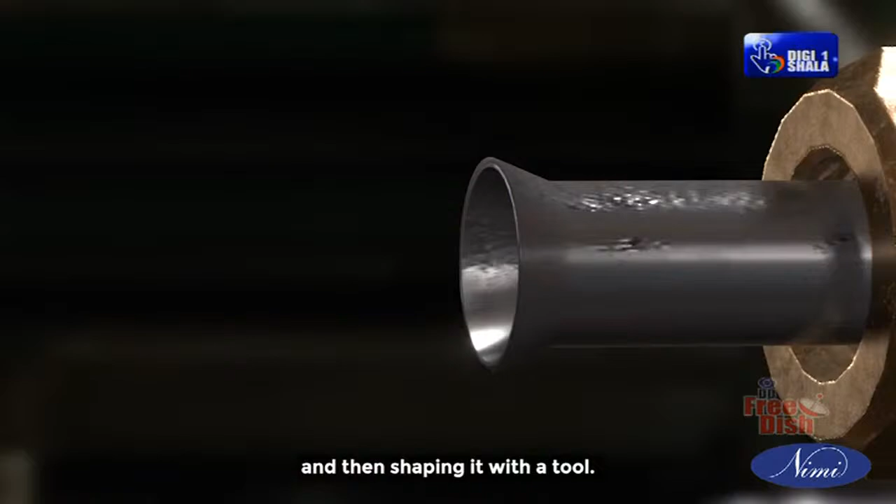The flared end helps to create a seal when the pipe is connected to another pipe or fitting. Flaring is used in a variety of industries including plumbing, oil and gas, mining, and steam systems.

Let's go into the video. At the end of this demonstration, you will be able to cut a GI pipe using a pipe cutter, remove burrs using a pipe reamer, flare the end of the pipe, join the flare nut with a flare fitting, and test it.

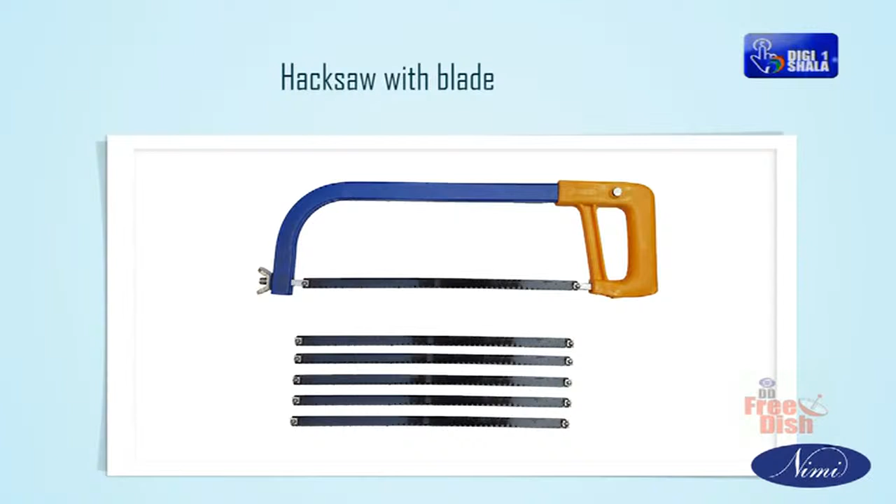Tools required: adjustable wrench 200 mm, valve key 6 mm, cylinder valve opener, pressure gauge with adapter, cylinder with pressure, water pump pliers, pipe cutter, hacksaw with blade, tri-square, punch tool.

Equipment required: flaring block with yoke, flat file smooth 200 mm, pipe vise. Materials required: GI pipe, flare nut to suit the pipe, thread seal tape, soap solution with stirrer, and a small quantity of oil.

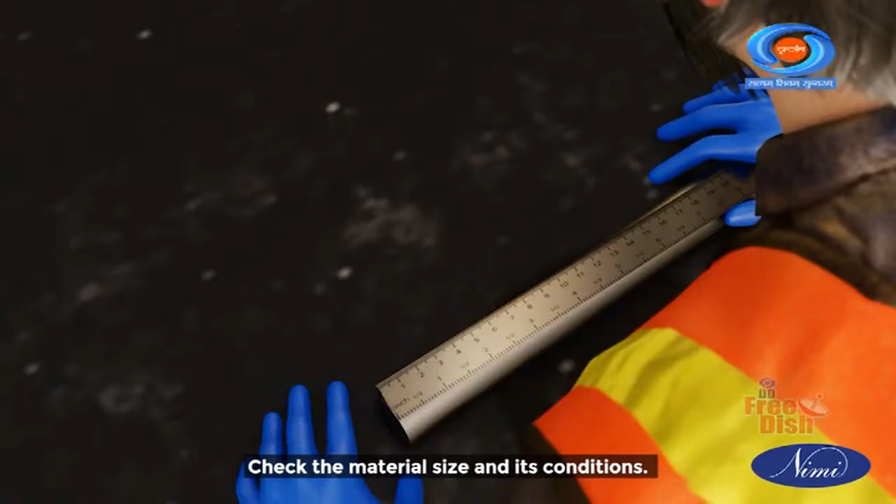Before starting the job, there are some preliminary checks to be made. Those are as follows: check the material size and its conditions.

File and check that the end of the pipe is exactly perpendicular to the pipe axis. Slightly deburr the inside and outside edge of the pipe. Clean the pipe throughout before installing into a flaring block. Insert and fix the pipe into the flaring block's selected hole.

Note: examine the pipe flaring tool before starting to flare the end of a pipe. Tighten the nuts at each end of the flaring block properly. Position the pipe end to at least 4 mm above the top of the flaring block.

Note: this distance is calculated as pipe diameter divided by 3. In this case, 12 mm divided by 3 is equal to 4.0 mm.

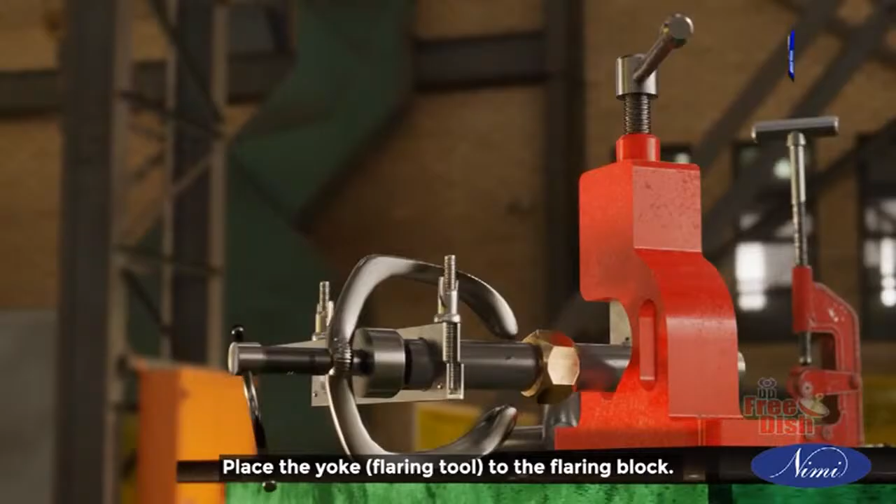Place the yoke, the flaring tool, onto the flaring block. Note: insert the flare nut before flaring. Oil the cone and slowly screw it into the end of the pipe. The end of the pipe will be formed into a flare. Note: do not over-tighten the screws.

Unscrew and remove the flared pipe from the block. Check the flare end for cracks. Note: because the cone was screwed down too quickly, the flare is cracked.

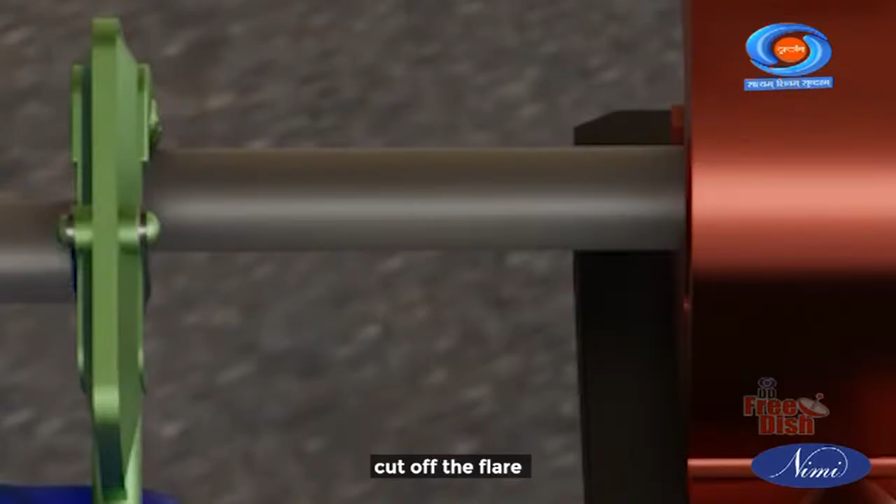Make sure that the flare is the correct size. If there is any crack or it is too loose while fitting the flare nut, cut off the flare and start again as per the above instructions until the flare is the correct size for the flare nut.

Next, we are going to make flare joints and test them with flare fittings. Flaring: brake line pipes, fuel pipelines, and air conditioner pipelines are sometimes joined to fittings by making a flared connection. The end of the pipe is opened out to form a cone.

Always place the special flare nut on the pipe first before flaring. Examine the pipe flaring tool. Make sure that you understand how it works before starting to flare the end of a pipe. Make sure that the end of the pipe is free of rough edges before flaring.

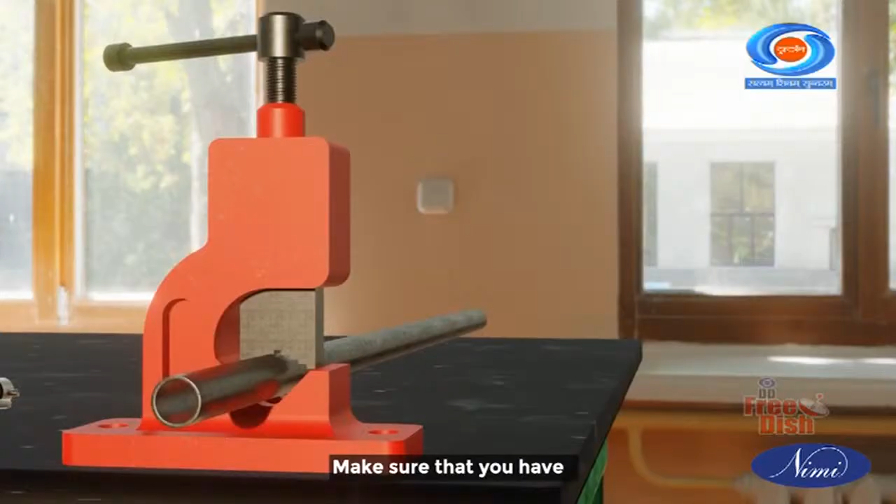Place the pipe in the tool. Make sure that you have placed the flare nut on the pipe. Choose the correct size hole in the flaring tool to fit the pipe. There are 5 holes to fit different sizes of pipe. If the pipe is 1 by 4 inch, 6 mm in diameter.

Position the pipe so that the end is at least 2 mm above the top of the flaring block. This distance is calculated as pipe diameter divided by 3. In this case, 6 mm divided by 3 is equal to 2 mm.

Tighten the nuts at each end of the flaring block. Fit the yoke to the flaring block. Note: repeat the steps for the various sizes of GI pipe.

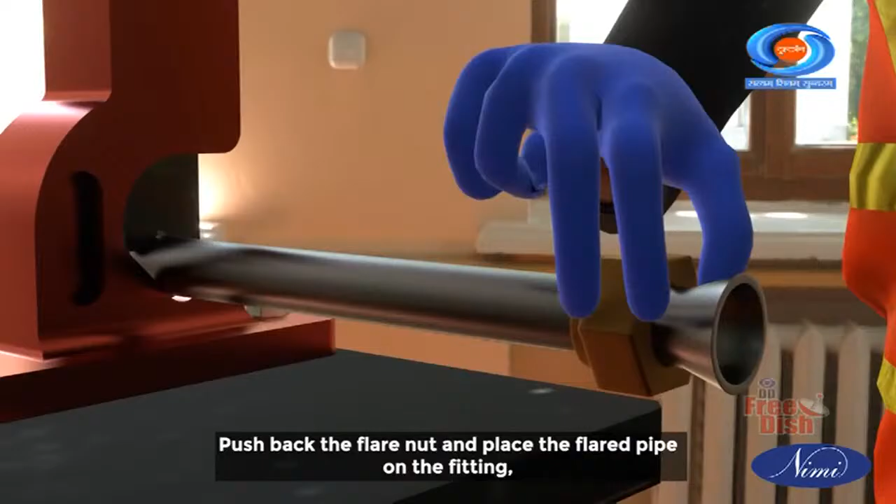Joining with flare fittings: put thread seal tape on the thread. Push back the flare nut and place the flared pipe on the fitting. Then tighten the flare nut using an adjustable wrench or suitable double-end spanner.

Tighten one end of the pipe to the cylinder with the flare nut. Connect a pressure gauge at the other end of the tube with a flare nut. Note: do not apply more pressure while tightening, since this will spoil the flare. Make sure that they are not loose in the pipe.

After joining the pipe firmly, open the cylinder valve with the help of a valve key or ratchet. Note: the pressure will be shown in the pressure gauge. Then close the cylinder valve.

Major leaks will make noise, and that needs the nut to be tightened. If there is no leak, the pressure in the pressure gauge will remain constant. If it decreases, check the joints with soap solution foam. A leak will bubble, then tighten the joints. If it stands still, then there is no leak.

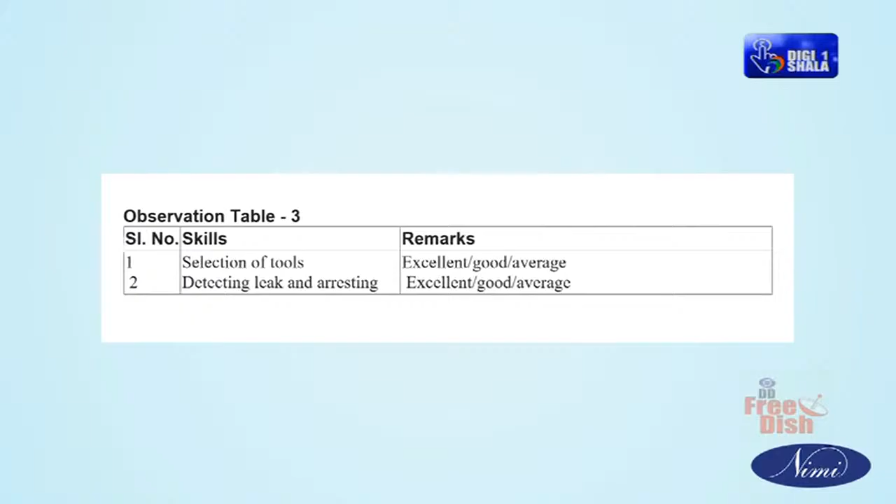Now let's have a look at handling of pipe flaring and cutting tools. Measure the required length of pipe and mark it with chalk. Keep the pipe in the pipe vise and tighten it.

Fit the pipe cutter on the GI pipe on the scribed line and tighten the jacking screw so that the cutting wheel is touching the pipe. Ensure that the pipe is kept horizontal and parallel to the serrations such that the marking is visible at the top. Rotate 1 or 2 turns to ensure that the cutting wheel is sitting exactly on the scribed line at 90 degrees to the pipe.

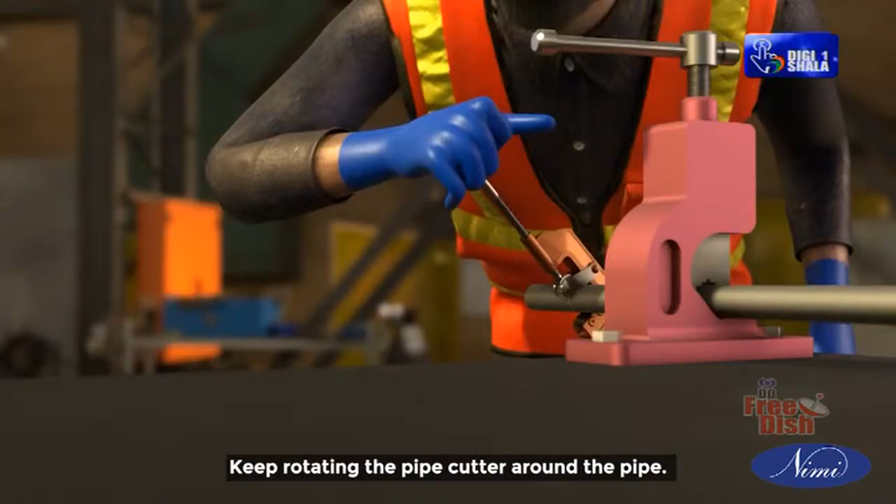Rotate the pipe cutter around the pipe. After 2 or 3 turns, use the jacking screw to apply pressure on the cutting wheel. Keep rotating the pipe cutter around the pipe, increasing the pressure by repeating the cycle until the pipe is cut through. Support the pipe with your left hand so that the free end does not fall.

Remove burrs using a pipe reamer. Check that the pipe ends are square. The inside edge of the pipe must be slightly deburred, and the outside edge of the pipe must be slightly deburred. With this edge as reference, the pipe is marked for bending.

Always use a pipe bending fixture for proper bending of the pipe. Clean the pipe thoroughly before installing it in the machine.

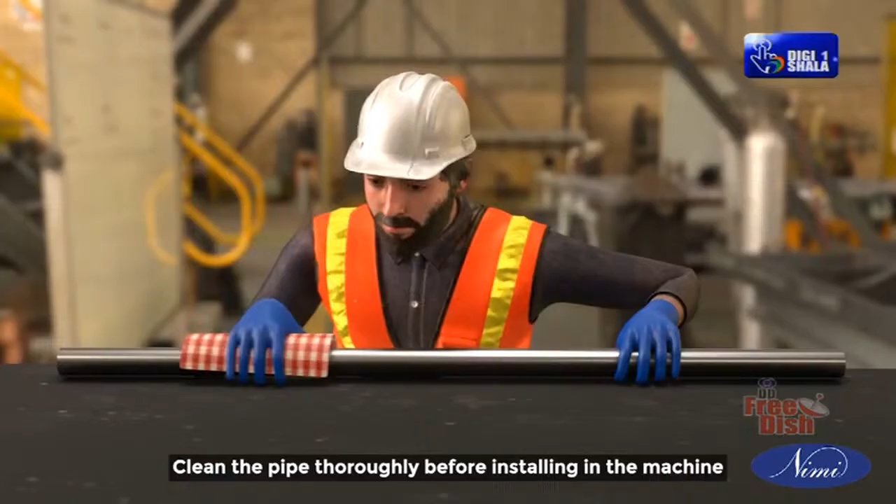Prepare the pipe end for a flare fitting. Flaring with block and punch tool: the pipe which is cleaned of burrs and bent should be selected. The pipe end is held in the flaring unit. Select the appropriate size of flaring unit to suit the pipe. The sleeve and cap nut should be assembled before flaring.

The flaring unit is held in a bench vise with the pipe. The correct length of pipe should be projecting for flaring; pipe edges should be in line with the surface. Using the flaring punch, flare the pipe end. Flaring can also be done using a compression type flaring tool.

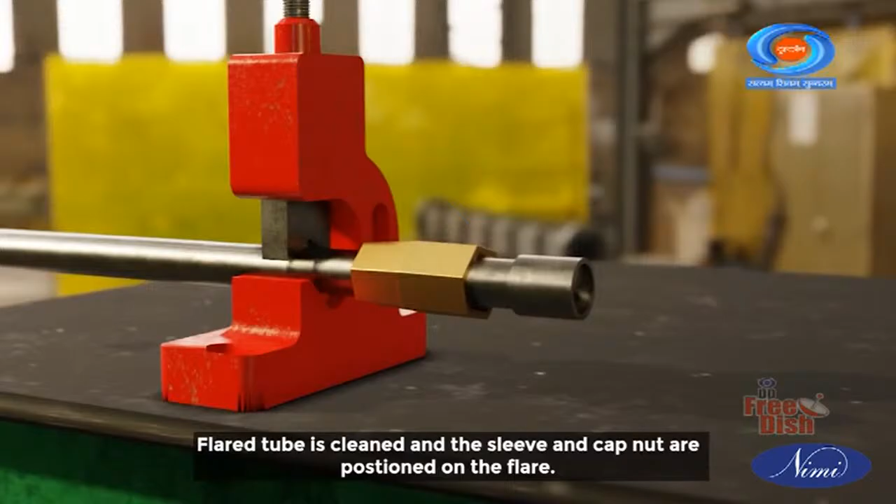Installing a flare fitting: the flared tube is cleaned and the sleeve and cap nut are positioned on the flare. Check that the flare angle is suitable to the sleeve angle. Place the flare on the connector end and confirm the angle is the same. Screw the cap nut onto the connector thread by hand, then use a suitable spanner and tighten the cap nut until the pipe does not rotate in the joint.

Let's have a recap of what we have learned today. We have learned to cut a GI pipe using a pipe cutter, remove burrs using a pipe reamer, flare the end of the pipe, joint flare nut with flare fitting and test it. Thus, we have learnt about flaring of pipes and pipe joints. Hope you have a clear understanding on this. Do this exercise with the help of your instructor.

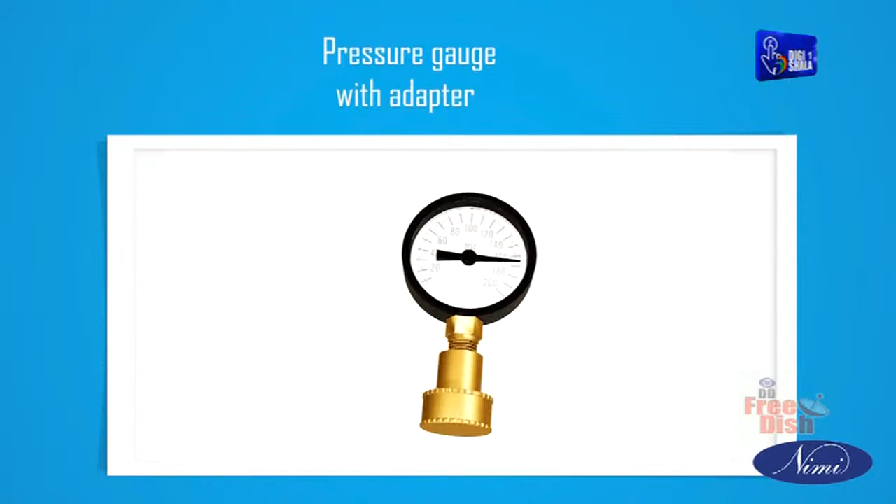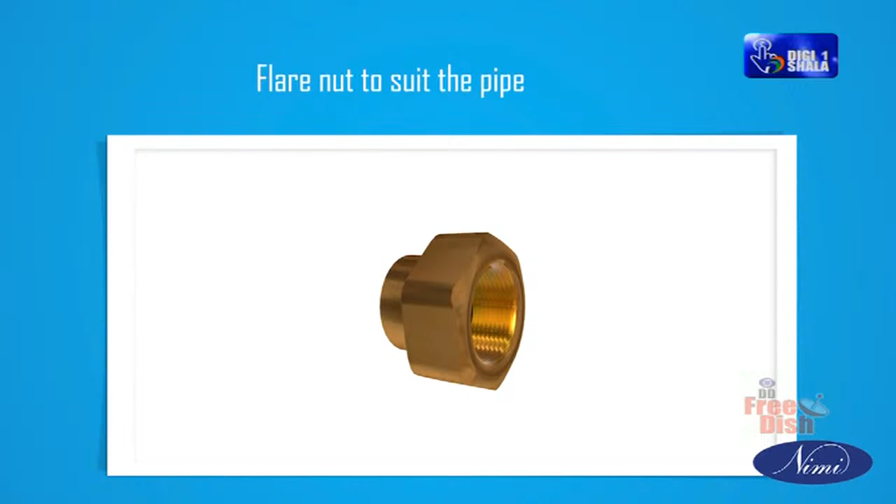Tools required: adjustable wrench 200 mm, valve key 6 mm, cylindrical valve opener, pressure gauge with adapter, cylinder with pressure, GI pipe cutter, pipe vise. Equipment required: flaring block with yoke, flat file smooth 200 mm. Materials required: GI pipe, flare nut to suit the pipe, wire brush, pipe die set with ratchet, thread cutting oil.

Before starting the job, there are some preliminary checks to be made. Hold the GI pipe in the pipe vise tightly. Mark the required length as per drawing. Fix the pipe in the pipe vise and tighten it to prevent it from rotating. Fix the pipe cutter on the GI pipe. Cut the GI pipe for the required length using the pipe cutter. Remove burrs using the pipe reamer. Check that the pipe ends are square using a tri-square.

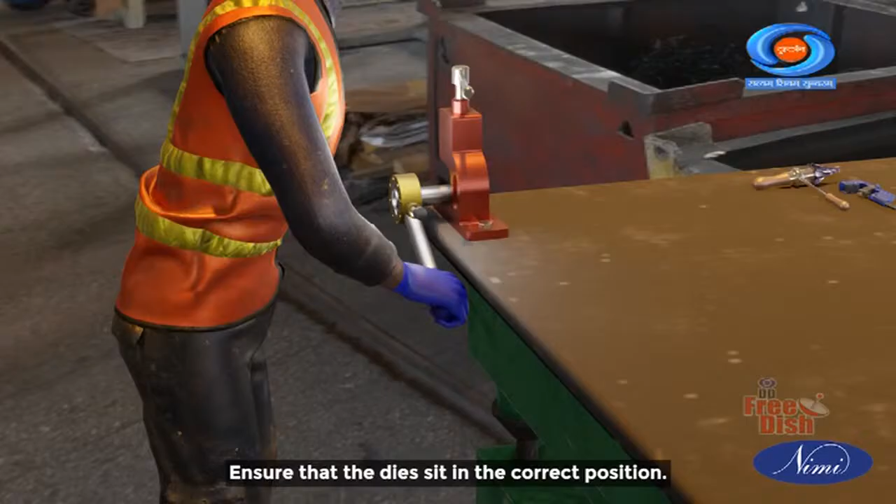Now we are going to thread GI pipes using die stocks. Select a set of dies and a ratchet type die stock. Open the adjustment lever, coincide the zero setting mark on the die stock, and insert the 4 dies according to the number on the dies and die stock respectively. Ensure that the dies sit in the correct position. Be sure that the number on the top edge of the die corresponds with the number of the slot into which it is to be placed.

Fix the pipe in a pipe vise and tighten it to prevent it from rotating, ensuring that the projection of the pipe is within 150 to 250 mm from the vise. Open the self-centering pipe guide and slide the stock over the end of the pipe. Adjust the pipe guide for correct sliding fit and lock it into position. Apply a cutting lubricant to the part which is to be threaded, using lard oil or mineral lard oil when threading GI pipes.

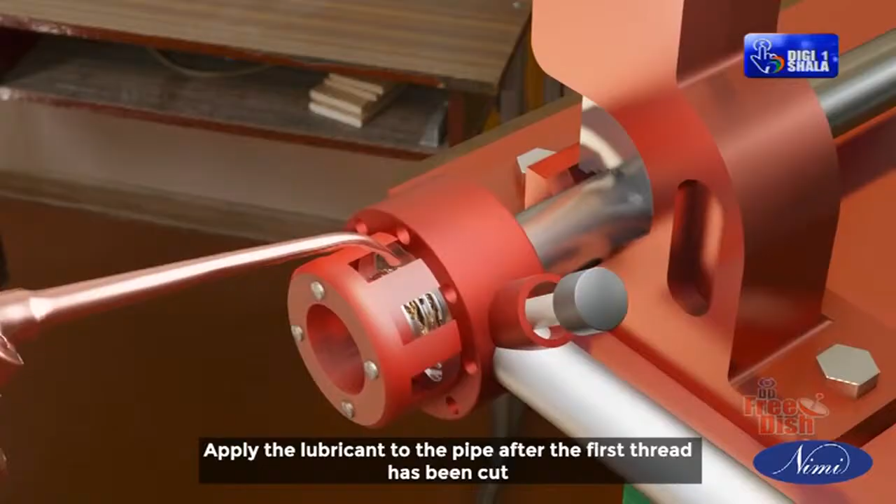Apply a little pressure to the stock and keep the handle at right angle to the pipe axis. When the dies bite into the pipe, stop pushing and continue the rotation by moving the handle up and down. Apply the lubricant to the pipe after the first thread has been cut.

Keep rotating the handles clockwise and check the length of the pipe thread. Note: ensure that the length of the thread is sufficient to fit halfway into the socket or coupling. If the die stock and the die stick, turn the stock anti-clockwise to break the chips.

Reverse the ratchet knob, ease the handle, and turn the stock anti-clockwise till the stock and dies come out of the pipe. Clean the thread with a wire brush. Form thread until the pipe extends about 1 or 2 threads beyond the end of the stock.

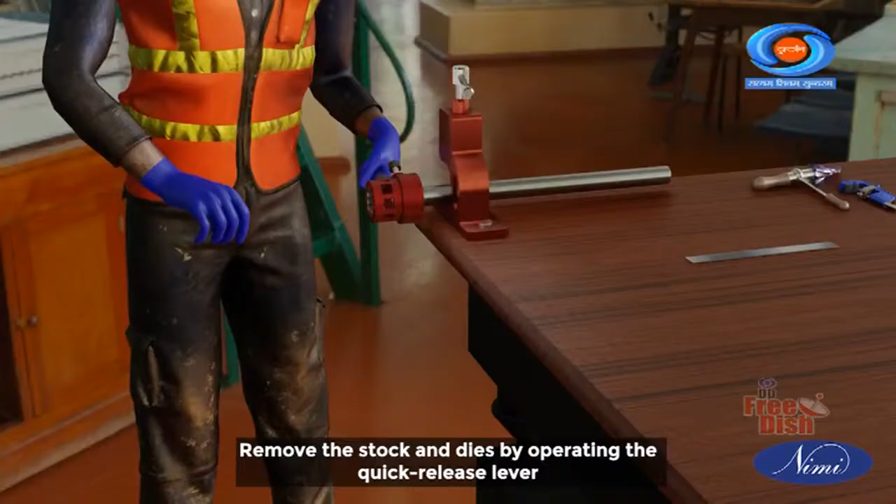Remove the stock and dies by operating the quick release lever and clean off the thread with a wire brush. Check the formation of thread with a standard fitting. Repeat the operation if the thread is too tight by adjusting the dies.

Let's have a recap of what we have learned today. We have learned to mark and cut pipe to length using pipe cutter. Thus, we have learnt about cutting and threading of pipe length. Hope you have a clear understanding on this. Do this exercise with the help of your instructor.

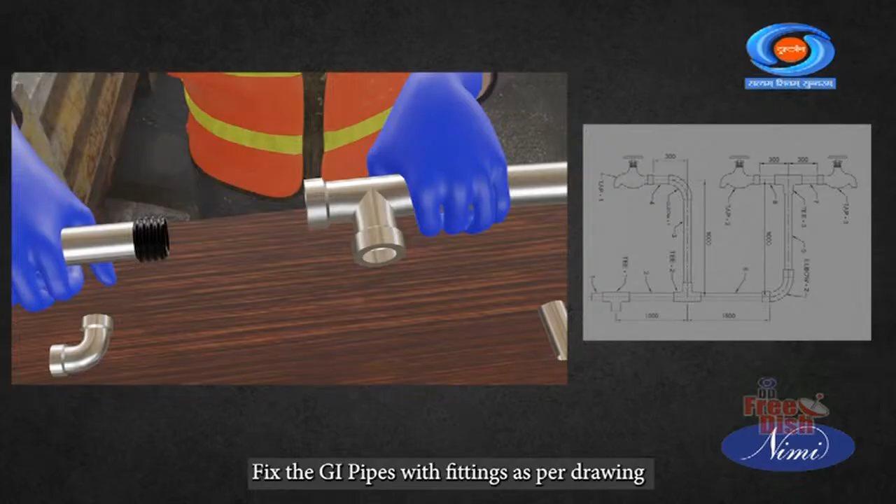that is required. Today, we are going to learn about fitting of pipes as per sketch, observing conditions used for pipe work. At the end of this demonstration, you will be able to fix the GI pipes with fittings as per drawing.

Tools required: Adjustable wrench 200 mm. Valve key 6 mm. Cylinder valve opener. Pressure gauge with adapter. Cylinder with pressure. Pipe cutter. Hacksaw frame with blade.

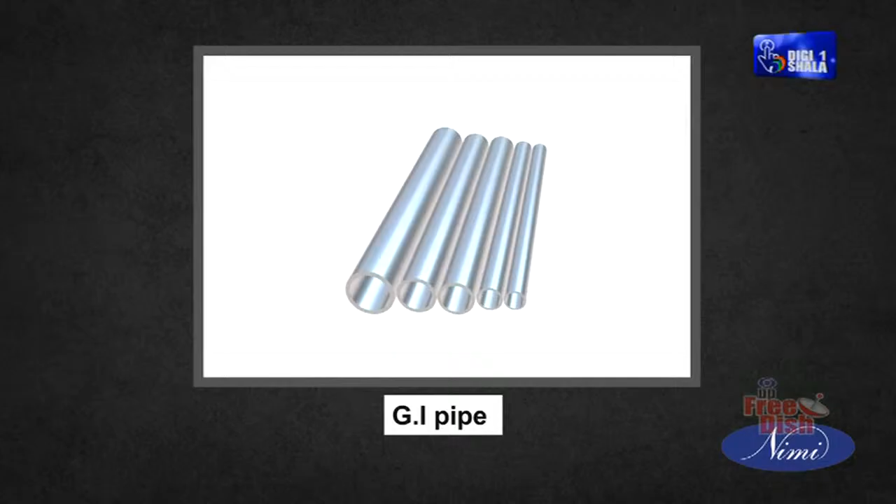Tri-square. Pipe die set. Water pump plier. Equipment required: flaring block with yoke. Flat file smooth 200 mm. Materials required: GI pipe. Flare nut to suit the pipe.

Before starting job, there are some preliminary checks to be made. Those are as follows. Calculate the length of pipe required based on drawing. Cut the pipes as per the calculated length using pipe cutter or hacksaw. Cut thread at the end of all the pipes using die stock. All the pipes have been measured and have been cut as per the calculated length. Now, let's begin with fitting.

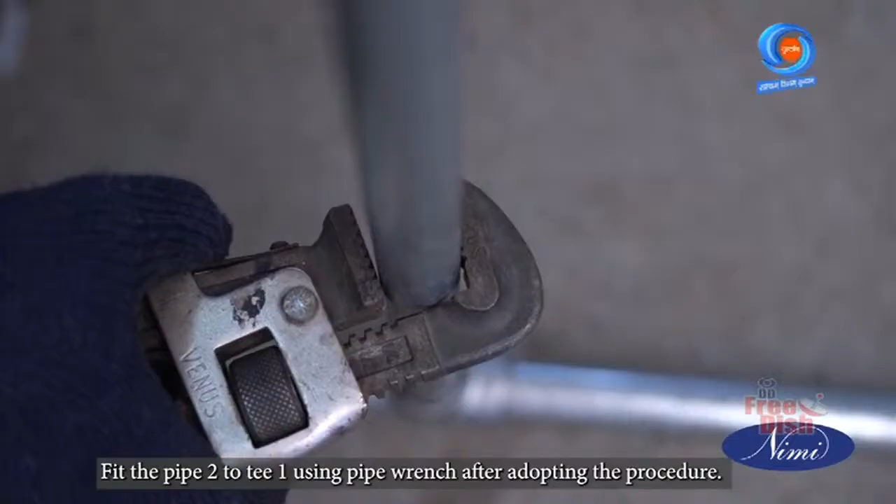Fit T1 to pipe 1 using pipe wrench. Fit the pipe 2 to tee 1 using pipe wrench after adopting the procedure. Fit elbow 2 to pipe 2 using pipe wrench after adopting the procedure. Fit pipe 3 to elbow 2 using pipe wrench after adopting the procedure.

Fit elbow to pipe 3 using pipe wrench after adopting the procedure. Fit pipe 4 to elbow using pipe wrench after adopting the procedure. Fit a socket to pipe 4 using pipe wrench after adopting the procedure. Fit bib cock to socket using pipe wrench after adopting the procedure.

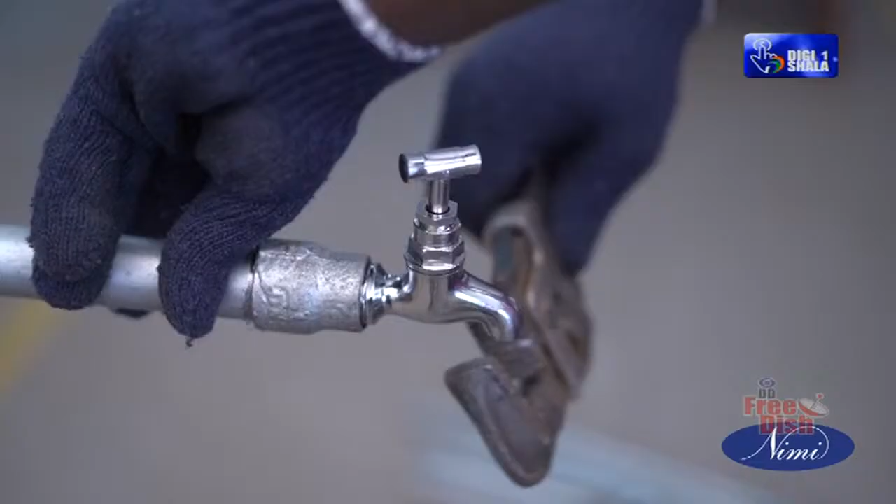Fit pipe 5 to T2 using pipe wrench after adopting the procedure. Fit socket to pipe 5 using pipe wrench after adopting the procedure. Fit bend to socket using pipe wrench after adopting the procedure. Fit socket to bend using pipe wrench after adopting the procedure.

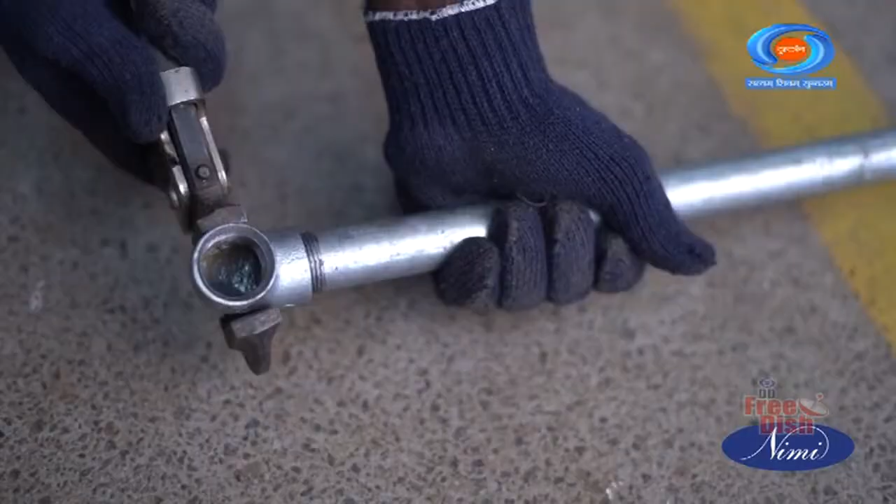Fit pipe 6 to socket using pipe wrench after adopting the procedure. Fit elbow 3 to pipe 6 using pipe wrench after adopting the procedure. Fit pipe 7 and 8 to T3 using pipe wrench after adopting the procedure. Fit socket to pipe 7 and 8 using pipe wrench after adopting the procedure. Fit bib cock to sockets using pipe wrench after adopting the procedure.

Remove any excess hemp, string or sealing tape after completing the joints using hacksaw blade or a blow lamp. Assemble pipe with standard fittings. Now we are going to assemble the pipe and pipe fittings. Hold the pipe number 2 in a pipe vise. Wind the hemp packing or cotton thread material on the external threads of the pipe.

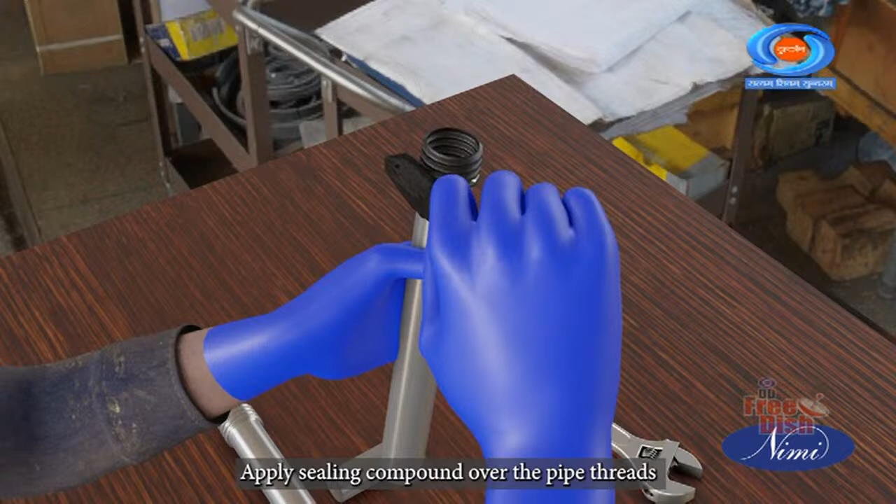Apply sealing compound over the pipe threads. Fit T2 to pipe number 2 and tighten it using a pipe wrench. Note: wind the hemp packing to external threads of all the pipes in standard fittings and apply sealing compound over the threads before joining with the other one. Fit pipe number 3 with elbow 2. Fit elbow 1 to pipe number 3. Fit elbow 1 to pipe number 4.

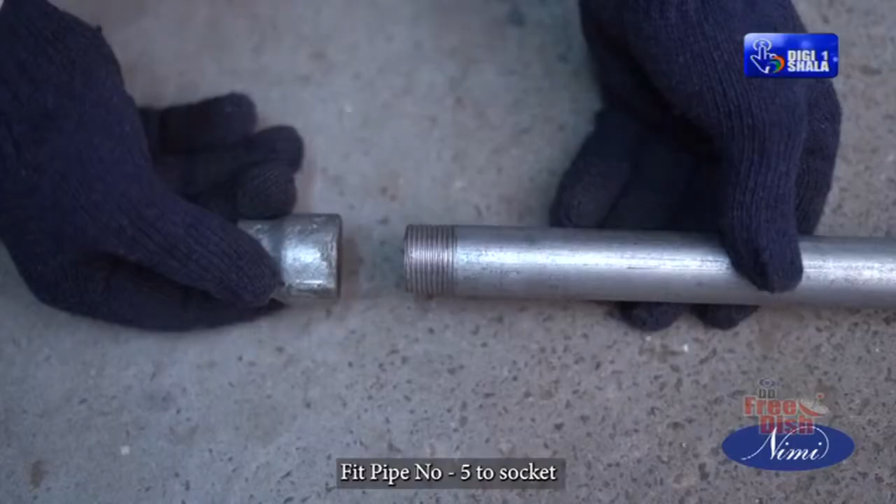Fit a socket to pipe number 4. Fit bib cock to socket. Fit pipe number 5 to T2. Fit pipe number 5 to socket. Fit socket to elbow 2 on both ends.

Fit socket to pipe number 6. Fit T3 to pipe number 6, 7, 8. Fit socket to pipe number 7. Fit socket to pipe number 8. Assembling elbow with pipe. Now we have successfully completed the assembling.

Let's have a recap of what we have learned today. We have learned to fix the GI pipes with fittings as per drawing. Thus, we have learnt about fitting of pipes as per sketch observing conditions used for pipe work. Hope you have a clear understanding on this. Do this exercise with the help of your instructor.

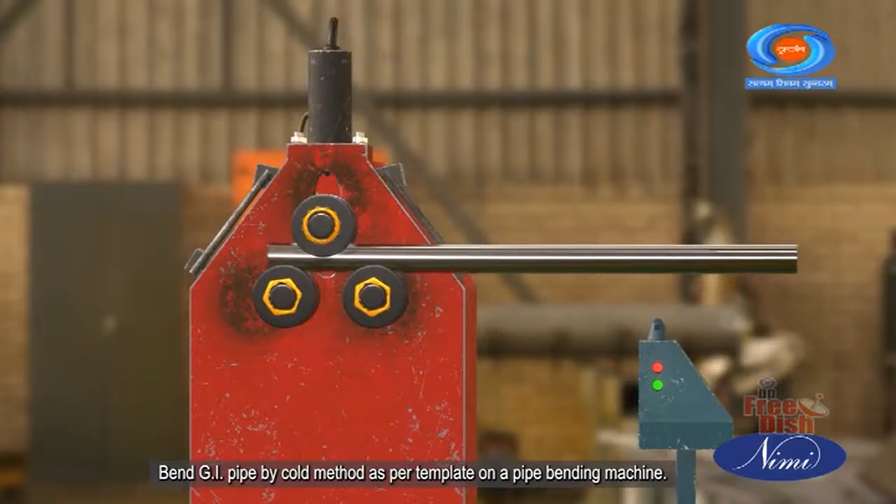At the end of this demonstration, you will be able to bend GI pipe by cold method as per template on a pipe bending machine, and bend GI pipe by heating and match with template.

Tools required: pipe wrench, tape measure, pipe cutter, hacksaw, pipe bender, tri-square, steel rule, soft hammer. Equipment required: pipe stand, hammer. Materials required: pipes, bending spring.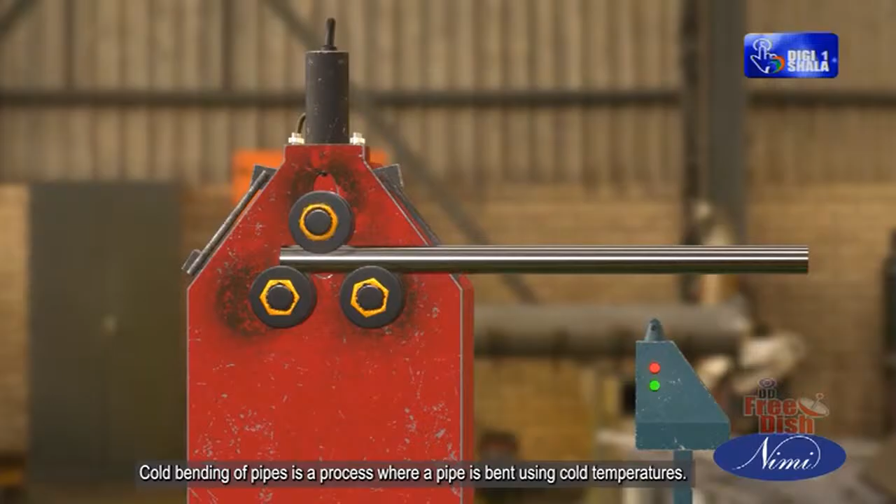The first method we are going to try is cold bending method. Cold bending of pipes is a process where a pipe is bent using cold temperatures. This can be done using either a cold bending machine or by putting the pipe in a freezer. The advantage of cold bending is that it can be done without having to heat the pipe, which can damage it. Cold bending also allows for more precise bends to be made.

R is equal to radius of bend. Theta is equal to angle of bend. L is equal to length of curved portion. Then L is equal to pi into d into theta divided by 360. Total length is equal to L1 plus L plus L2. Mark off the beginning and the end of the bend from the center line.

Select the standard former to suit the size of the pipe. Fix the bending machine in a bench vise and ensure it is tightened properly. Locate the tube stop bar at the required position. Set the roller on the bending arm by adjusting the screw and lock nut.

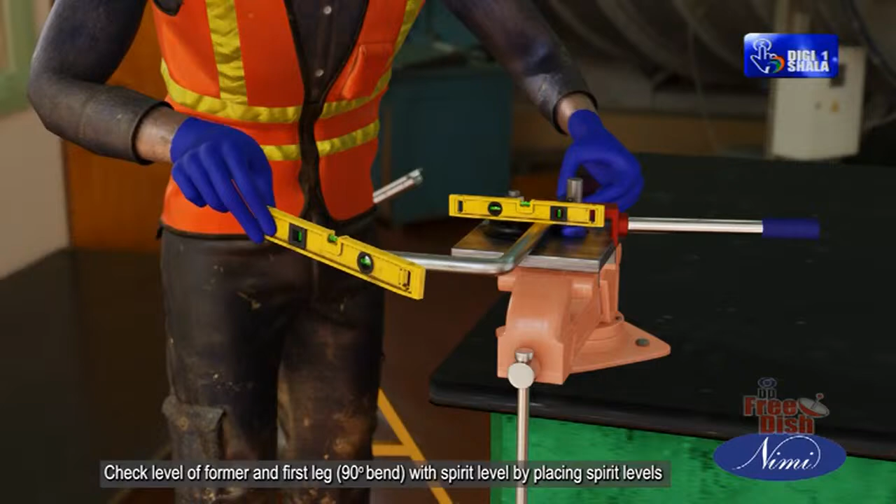Bend the pipe by pulling the bending arm towards your body. The sleeve bends the pipe round the former as the bending arm is pulled. The backstop holds the tail end of the pipe in position. Check the bend for squareness, use a set square. Check level of former and first leg 90-degree bend by placing spirit levels. Check the angle of bend and radius using standard template.

Bending 120 degree by hydraulic bending machine. Fit the pipe former onto the cylindrical arm. Place the pipe between the forming head plates and against the former. Support the pipe and fit dollies or rollers between the upper and lower plates of the forming head. Locate them in position by inserting pins through the plates and the dollies.

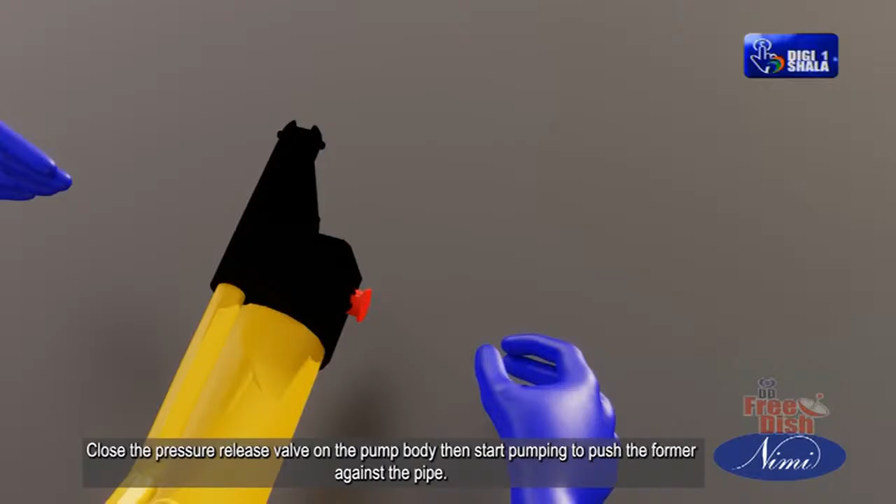Close the pressure release valve on the pump body, then start pumping to push the former against the pipe. Turn the pressure release valve anti-clockwise to release the pressure in the hydraulic cylinder. When the arm has moved back about 6 mm to 10 mm, close the pressure release valve to hold the ram steady. Check both bends 90 degree and 120 degree by placing pipe on the layout.

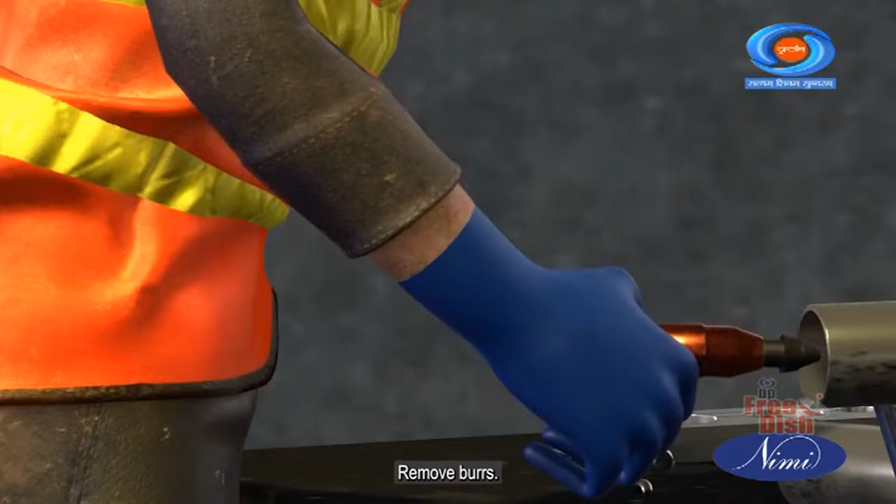File the pipe end square. Remove burrs. Calculate the length of pipe. If D is equal to diameter of bend, theta is equal to angle of bend, L is equal to length of curved portion, then L is equal to pi into D into theta divided by 360.

If OA is equal to inner radius of bend, R, AB is equal to radius of pipe, r, OB is equal to radius of bend, R plus r, then L is equal to R plus r into theta into 0.01745. Total length of pipe is equal to L1 plus L2 plus L.

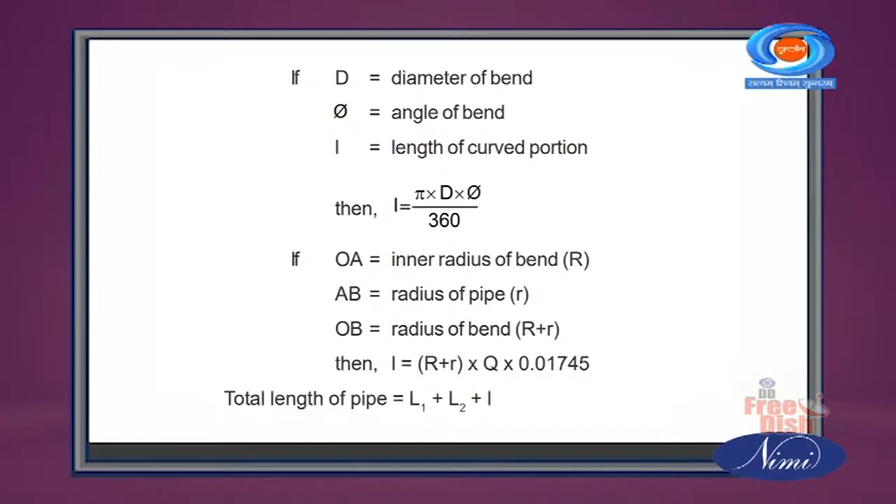Measure and mark off the center of the bend, beginning and end of the bend from the center line. Plug one end of the pipe with a wooden peg. Measure the inside diameter of the pipe and select two suitable wooden pegs for the pipe. Fill the pipe with clean, dry and fine sand. Compress the sand by tapping the pipe up and down with a soft hammer and plug the end. Ensure that the entire pipe is filled with sand.

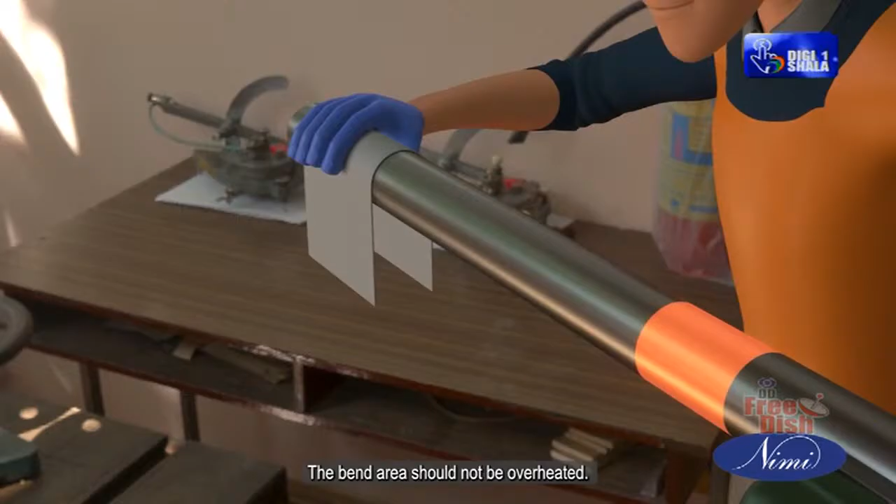Clamp one end of the pipe in a vise and protect the clamped portion of the pipe with lead or copper shims. Heat the area to be bent with oxyacetylene torch evenly until it glows dull red. The bend area should not be overheated. Pull down the pipe gently in the direction of the bend. Take short pulls until the correct bend angle is reached. Check the bend radius with a template. Apply heat throughout the whole operation and overbend slightly and straighten out the final bend.

Remove one end of the plug. Note: ensure that the pipe is cooled before removing the plug. Remove the sand by tapping the pipe gently with a hammer.

Let's have a recap of what we have learned today. We have learned to bend GI pipe by cold method as per template on a pipe bending machine. Bend GI pipe by heating and match with template. Thus, we have learned how to bend pipes using hot and cold method. Hope you have a clear understanding on this. Do this exercise with the help of your instructor.

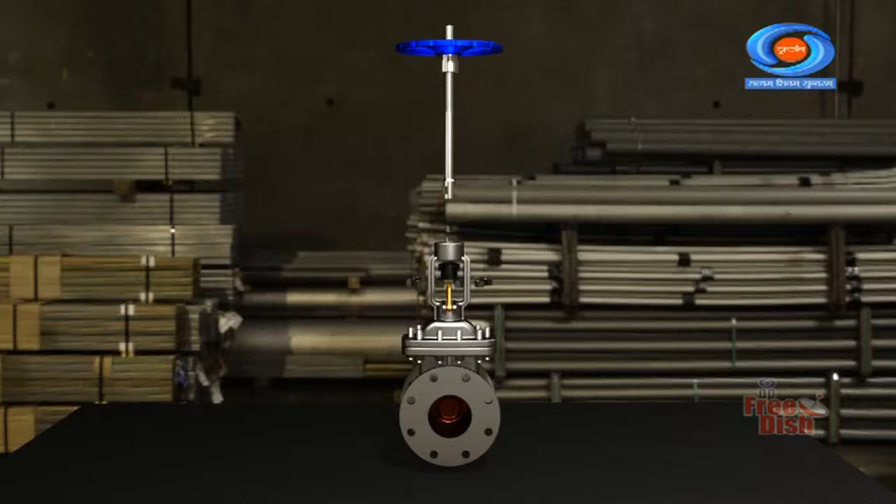At the end of this demonstration, you will be able to dismantle and assemble a globe valve, dismantle and reassemble a sluice valve, gate valve, dismantle and assemble a stopcock.

Tools required: spanner, screwdriver, file, hacksaw, hammer, pipe wrench, pipe die set, adjustable spanner, pliers, soft hammer.

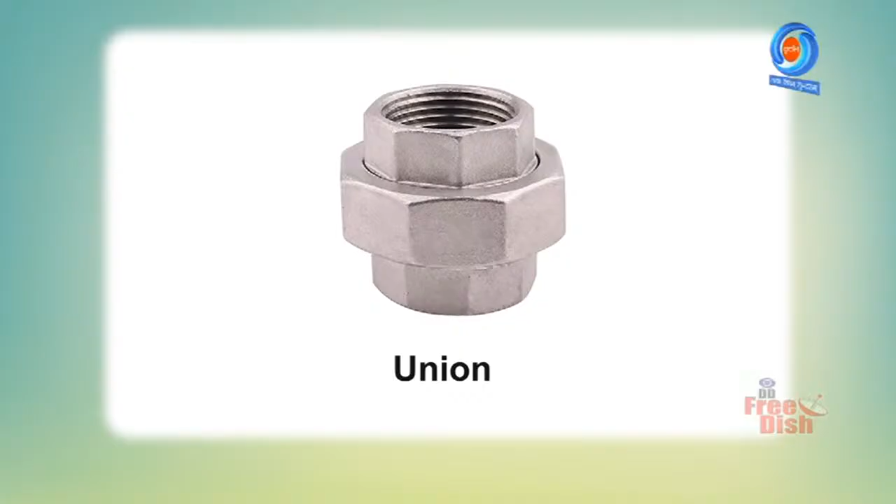Equipment required: pipe vise, bench vise, oil can. Materials required: stopcock, union, thread seal material. Now, let's have a look at the parts in the following components. First, we'll look at the parts of globe valve.

Globe valve. Hand wheel or key. Shaft or spindle. Packing nut, gland nut. Stuffing box with packing. Bonnet. Thread portion of the spindle. Metal valve or metal disc with rubber washer. Inlet. Outlet. Valve seat. Globe-shaped body. Now, we'll look at the parts of sluice or gate valve.

Sluice or gate valve. Hand wheel or key. Shaft, spindle. Packing nut, gland nut. Stuffing box with packing. Bonnet. Screw adjustment. Seat and disc gate. Flow of water. Now we are going to see the dismantling and assembling.

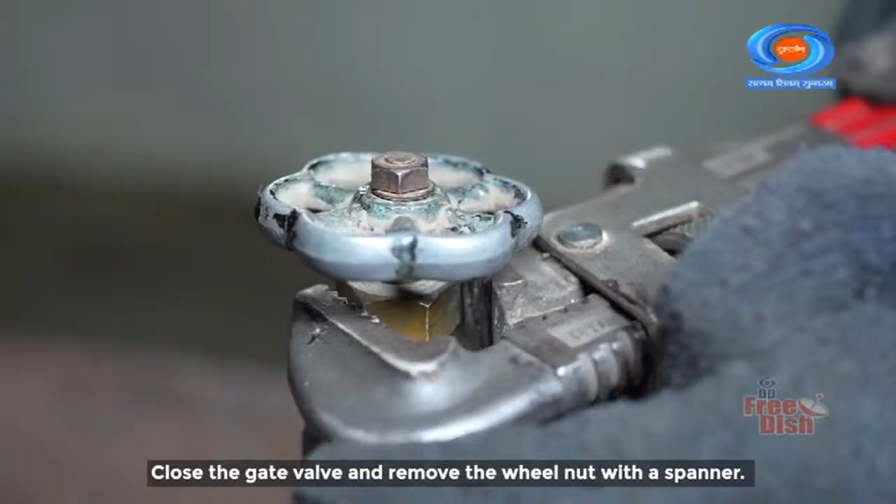Shut off the water by closing the main valve. Close the gate valve and remove the wheel nut with a spanner. Remove the gland nut from the bonnet. Clean out the old packing in the stuffing box. Remove the bonnet with a spindle from the body and clean all the parts. Coil the asbestos rope, smear it with water pump grease and push it down with a screwdriver.

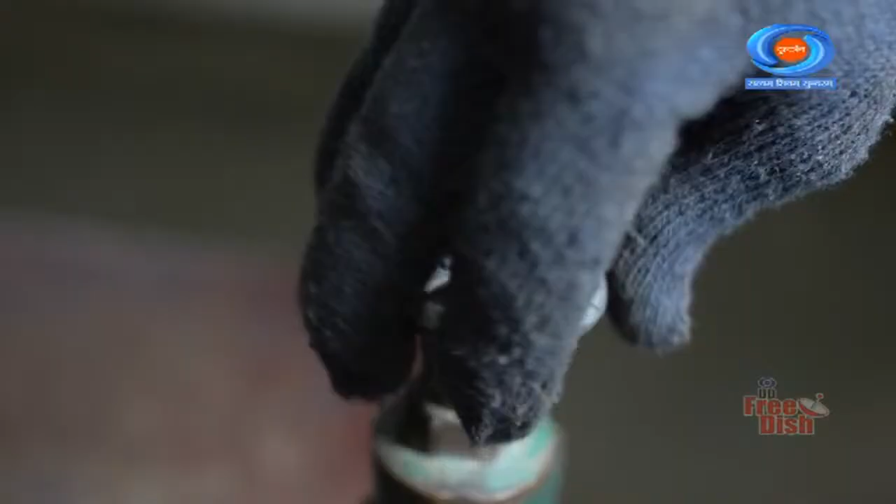Assemble the spindle gate to the bonnet. Assemble the gland nut, hand wheel and tighten the hand wheel nut. Open the gate valve and tighten the gland nut until the packing is compressed sufficiently to stop the water escaping from the gland nut. Note: do not use the gate valve to regulate the flow. It should be either in fully opened or fully closed condition.

Clean the pipe joints free from rust and dirt. Loosen the union and separate the pipe joint. Loosen and remove the pipe nipple from stopcock. Loosen and remove the stopcock from the pipe joint. Dismantle the stopcock parts one by one systematically. Clean all the parts properly.

Check the parts of thread. If worn out, replace with correct one. If it is in good condition, clean it properly and use it. Check the washer, whether it is damaged or in good condition. If damaged, change the washer. Reassemble the parts to ensure good condition. While assembling the dismantled parts, the last one should fit first and vice versa sequence.

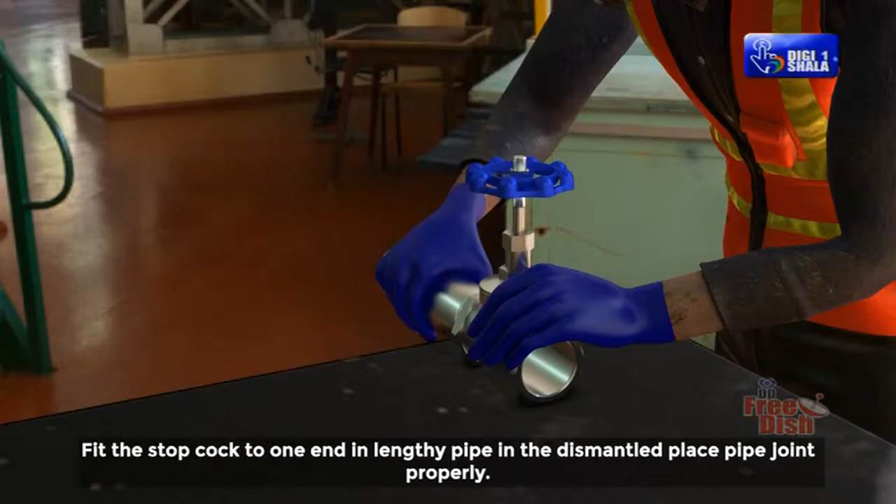If the stopcock is in damaged condition, change it with new stopcock. Fit the stopcock to one end in lengthy pipe in the dismantled place pipe joint properly. Fix the pipe nipple to other end of stopcock properly.

Next, fit the union with pipe nipple properly. Apply pressure and test the pipe joints and stopcock. Check for leakage, if any, to ensure proper working.

Note: the arrow embossed on the stopcock is to be in the direction of flow of water. Check the direction of the arrow before fitting the stopcock. Don't over-tighten the stopcock and other pipe fittings. Use proper tools for dismantling and assembling pipe fittings.

Let's have a recap of what we have learned today. We have learned to dismantle and assemble a globe valve, dismantle and reassemble a sluice valve or gate valve, and dismantle and assemble a stopcock. Thus, we have learnt how to dismantle and assemble globe valves, sluice valves and stopcocks. Hope you have a clear understanding on this. Do this exercise with the help of your instructor.

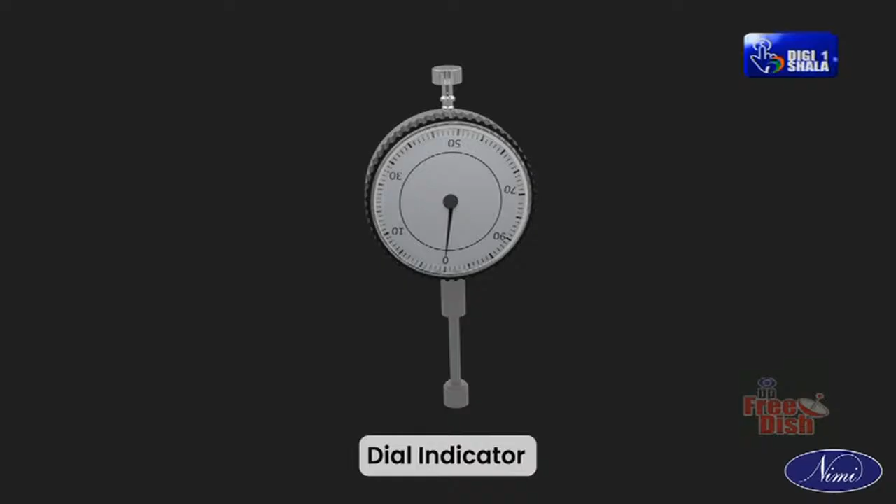Gun oiler, spanners, wrench, Allen key, kerosene, banian cloth, safety goggles, gloves.

In order to perform routine checks, turn off the power supply of the machine to avoid someone using the machine during the maintenance procedure. Ensure to wear safety tools while filing cylindrical surfaces to prevent injuries and also to ensure a safe work environment.

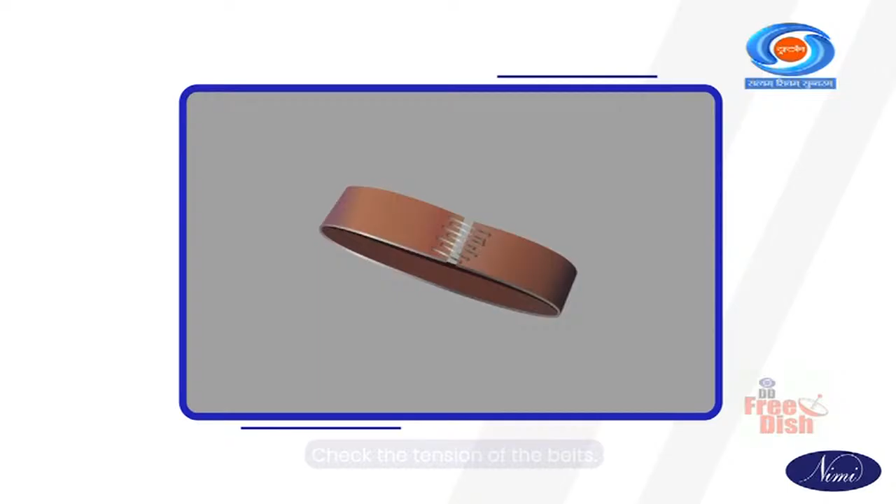First, open the side cover and check the driving belts. If the belts are damaged or have excessive cracks and wear and tear, they must be replaced. Check the tension of the belts. Check brake conditions if the lathe machines have pedal brakes.

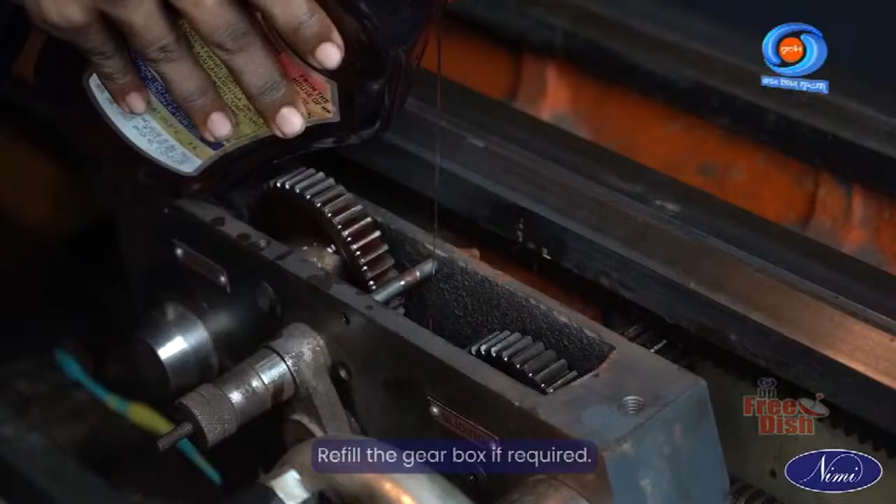Next, turn on the lathe machine and run the lathe for a couple of minutes. Check the level of lubricating oil in the main gearbox visually. Refill the gearbox if required. While running, check whether all the automatic feeding movements are working properly.

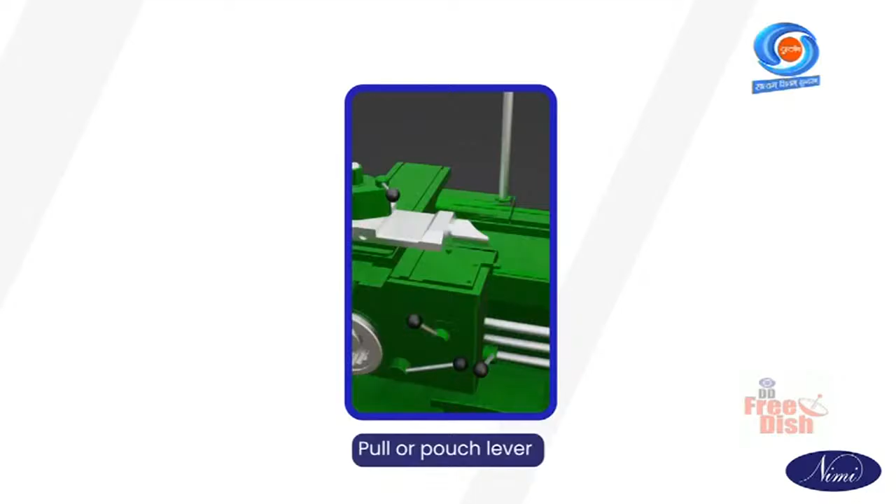Check the tailstock locking condition. Check whether both levers are locked properly. Check the top bench lubrication manual pump. Pull or push the lever to verify that the oil is coming to the sliding bench.

Check the level of lubricating oil in the lubrication tank. Then check the level of coolant and refill it if required. Lubrication has to be done with a gun oiler periodically. For the headstock, lubrication is required twice a year.

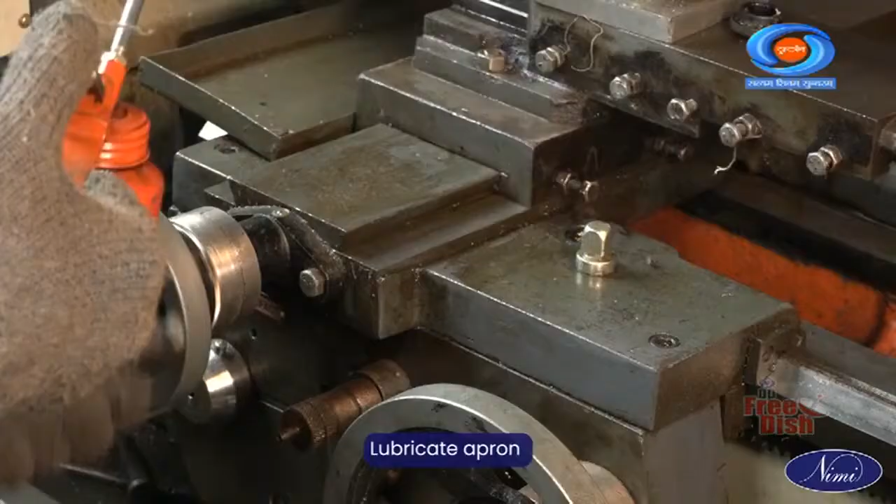On a daily basis, compound slides and tailstock nipple lubrication should be done by gun oiler. Lubricate the apron and carriage using a handle pump on a daily basis. Also, lubricate the change gear nipple, lead screw nipple and bedways by gun oiler on a daily basis.

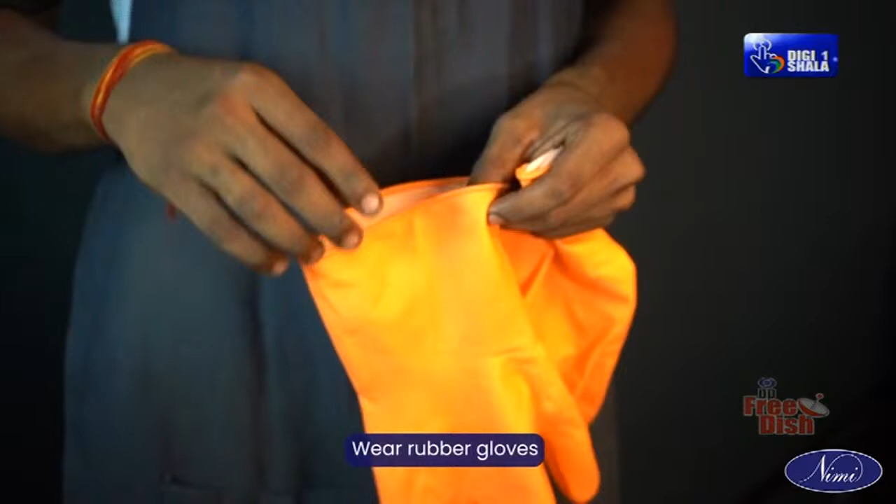Maintaining the coolant level is very crucial in the lathe machine. Empty the coolant tank and fill up with new coolant as and when required. Wear rubber gloves to avoid contact with coolant during the refilling process.

Before refilling, check the bottom of the coolant tank for any solids. If there are any solids, remove them and always keep the coolant tank clean. Once the coolant tank is checked, run the lathe and test that the coolant is supplied properly.

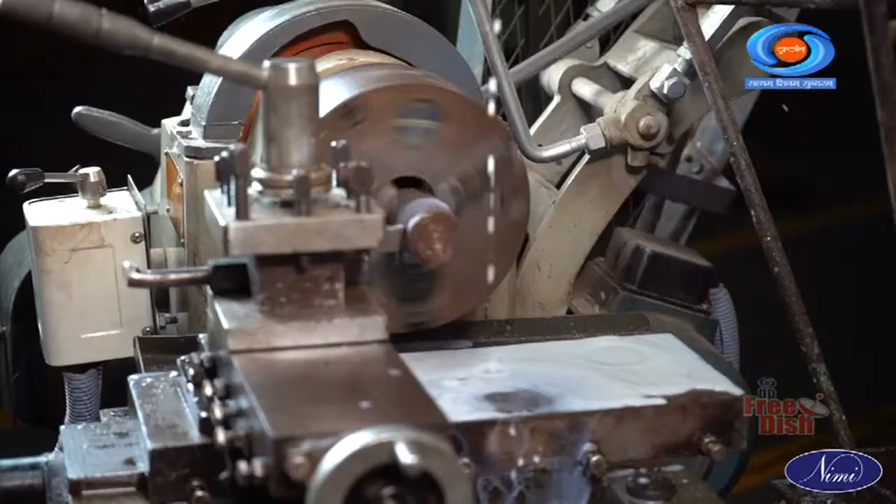Next, check the electricity supply. First, check the main power cable for its condition. If there is any damage, replace it. Verify the condition of all the external switches. If there is any damage, repair or replace it.

Check the condition of all the limit switches. They must be strong in position, because a loose or damaged limit switch can generate a continuous fault on the machine.

Finally, check the final point alignment. Once a year, verify the alignment of the center of the tailstock with the center of the headstock, depending on the required precision.

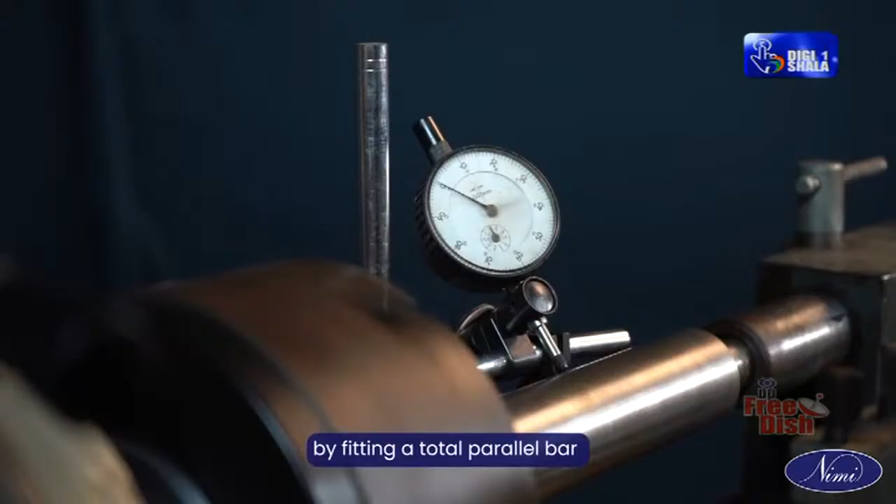Here, alignment can be obtained by fitting a total parallel bar between the centers and by using a dial indicator to verify parallelism between centers.

Let's recap the key points discussed. Turn off the power supply while performing a routine check. Check the condition of belts, limit switches, lubricants, and all the moving parts for any damage. Check the level and quality of the coolant in the coolant tank. Check the final point alignment.

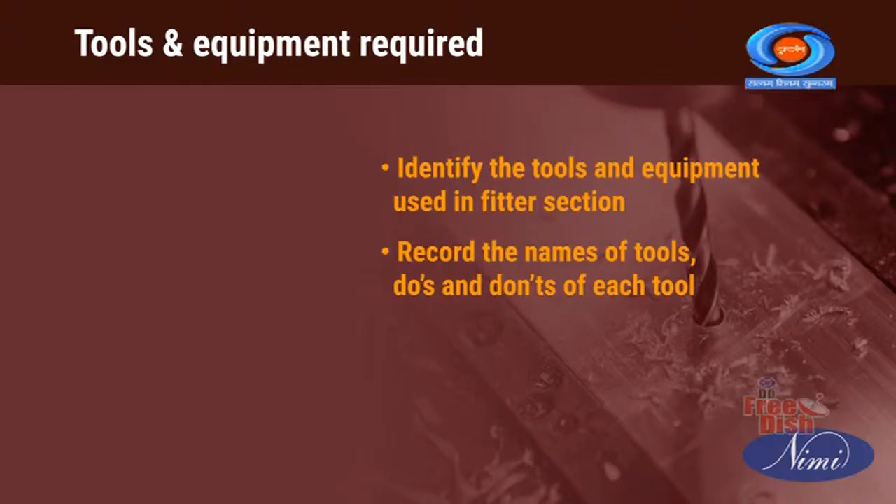Tools and equipment required. Identify the tools and equipment used in fitter section. Record the names of tools, do's and don'ts of each tool, and record the names of the industries where fitters are employed.

Tools and equipment required: steel rule, tri-square, scriber, dot punch, bench vise, flat file, triangular file, square file, vernier caliper, chalk powder, drill bit, bevel protractor, hacksaw, hammer.

Safety precautions in fitting. Demonstration activities, shop talk with safety. Safety attitude development of the trainee by educating them to use personal protective equipment. Identify personal protective devices and interpret the different types of personal protective devices.

Eye protection: safety glasses. Foot protection: safety shoes. Dust and fumes: respirators. Hand safety: gloves. Head safety: helmet. Hearing protection: earplugs. Clothing: safety jacket. Prevent from falling: safety harness.

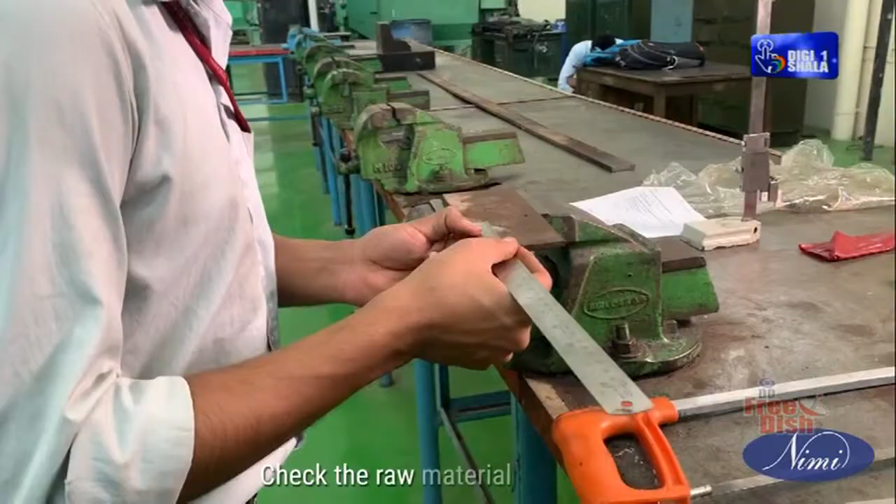File to size and check for flatness and squareness. Apply marking media on the surface. Mark all dimensions and angle on the workpiece using vernier height gauge and vernier bevel protractor. Punch on the marked lines.

Drill relief holes of 3 mm on all corners. Remove unwanted internal material by drilling and using square and triangular files. Angular edges are to be finished with a triangular file, and straight edges are to be finished with a straight edge file. Part 1 is to be finished to suit with Part 2.

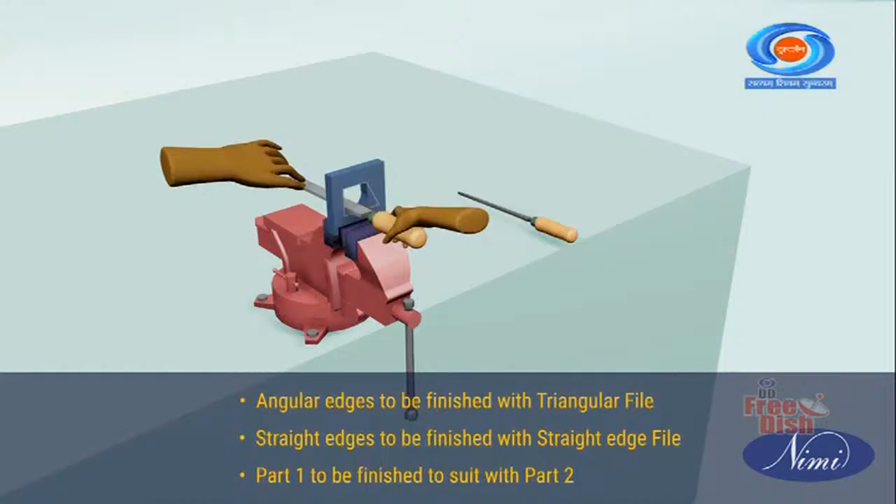How to file and finish part 1 and 2 as per dimensions keeping straight. Part 1 and 2 for straight and angular surfaces fit together in a sliding way.

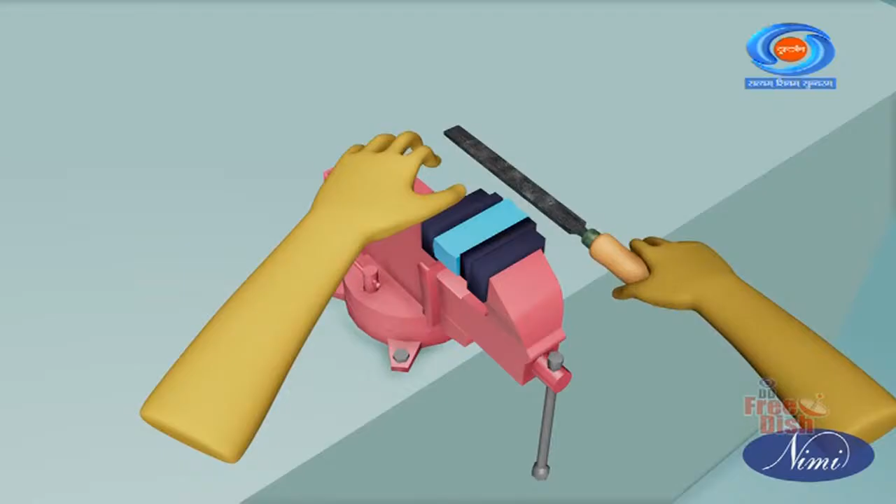Check the raw material for its size. File to size and check for flatness and squareness. Mark all dimensions and angle on the workpiece using a vernier bevel protractor. Punch on the marked lines. File and finish the part to 28 by 25 by 40 millimeters and angle to 60 degrees.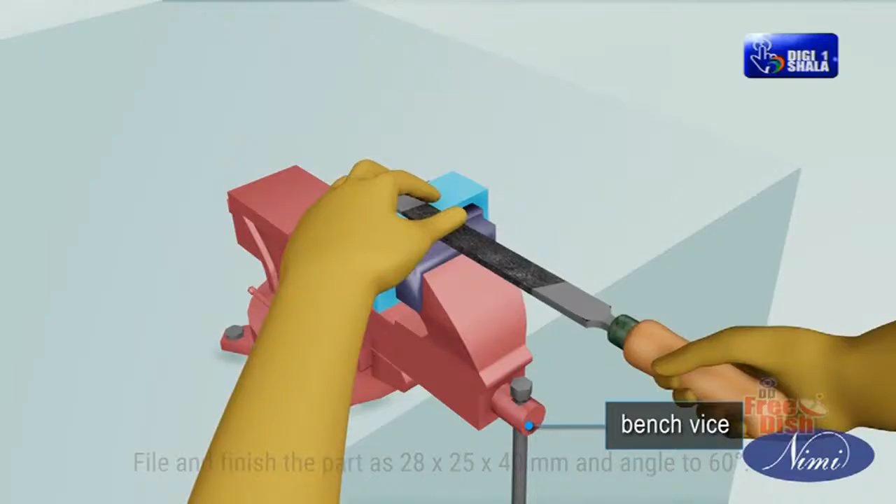At the end of this exercise, you shall be able to assemble part 1 and 2 with a sliding fit, part 2.

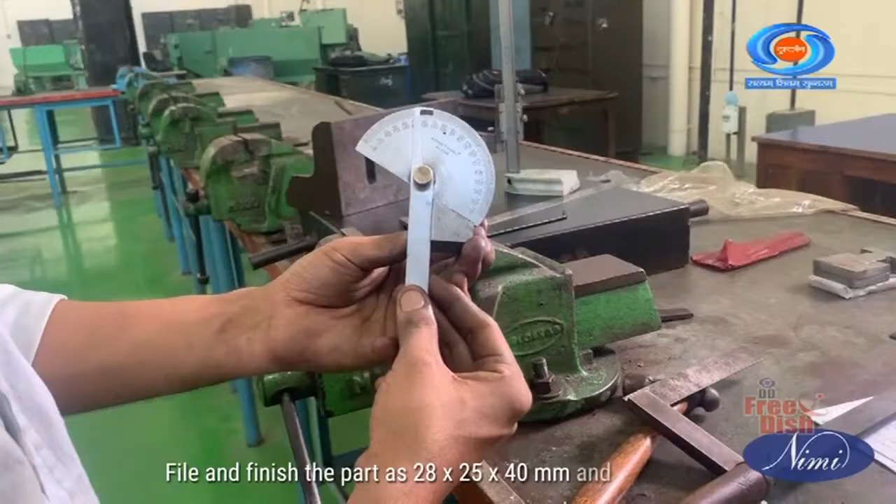File and finish the part as 28 into 25 into 40 millimeters and angle to 60 degrees. Assemble and check the finished parts.

Recap: tools and equipment required, and safety precautions in fitting. Now you have learned how to file and finish parts as per dimensions, with file angle tolerance of 10 minutes and angle face tolerance of plus or minus 0.02 mm, to remove internal material by drilling and filing. Hope you had a clear understanding of this technical process. Thank you.

Hello everyone. In today's video, let us discuss how to identify different ferrous metals using the spark test. Objectives: at the end of this video you will be able to support the metals on the tool rest, grind the metals on the wheel face, and identify different ferrous metals by spark test.

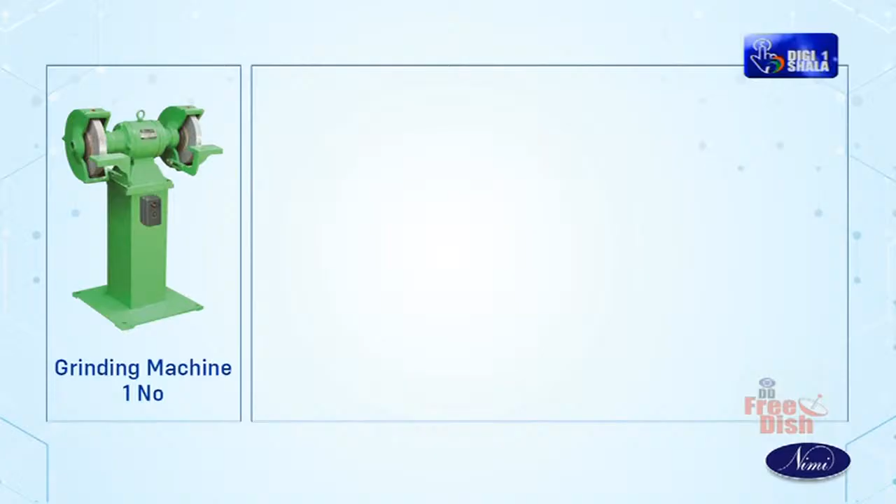Let us discuss the machineries required to do this practical: one grinding machine. Different ferrous metal pieces are used for grinding like cast iron, wrought iron, pig iron, low carbon steel, medium carbon steel, high carbon steel, stainless steel, high manganese steel, and tungsten magnet steel, each one piece.

First, let us discuss ferrous metals. The term ferrous metals refers to those metals that contain iron. Ferrous metals typically rust easily when exposed to moisture because of their high carbon content, along with numerous other alloying components such as chromium, nickel, manganese, molybdenum, and vanadium. Manganese can be used to create ferrous metals.

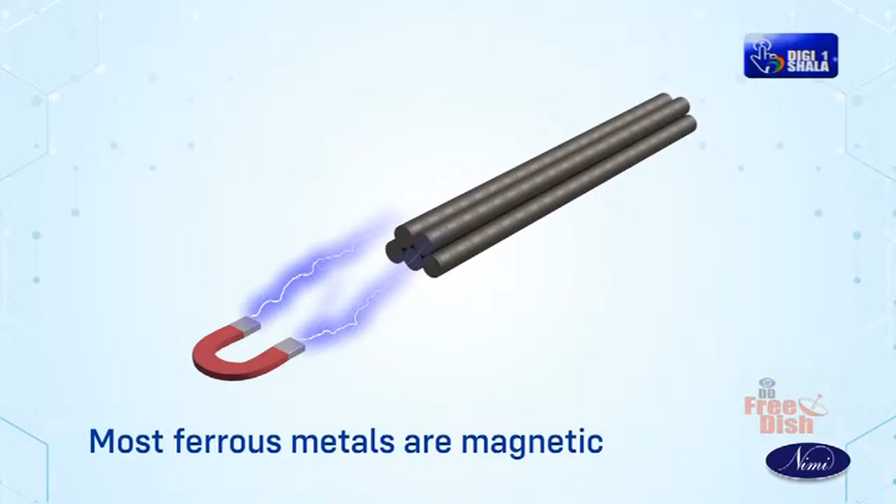Ferrous materials can be used for a range of engineering and non-engineering purposes, such as making tools, pipes, containers, cutlery, and larger constructions like skyscrapers. The fact that most ferrous metals are magnetic makes them ideal for use in electrical and motor applications. Your refrigerator door's use of ferrous metals enables you to use a magnet to attach your shopping list to it.

Iron, cast iron, wrought iron, alloy steel, and carbon steel are some typical ferrous metals. Because of their tensile strength and longevity, these metals are highly valued. The longest and tallest bridges are made of carbon steel, also known as structural steel, which is a mainstay in the construction sector. Ferrous metals share some basic properties, including being prone to rust and being magnetic.

The list of common ferrous metal properties includes: durable, good tensile strength, good electrical conductivity, low corrosion resistance, silver in color, recyclable.

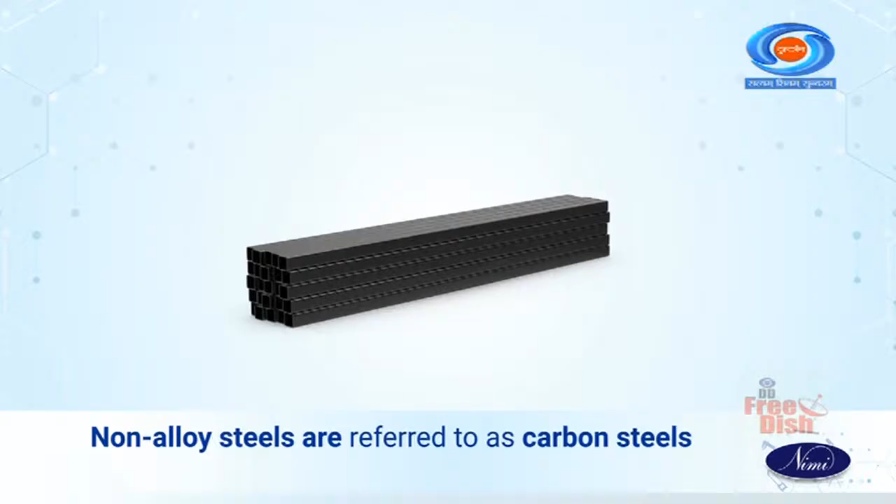Non-alloy steels, also referred to as carbon steels, use carbon as the alloying ingredient. Other elements including manganese, silicon, sulfur, and phosphorus are present in these steels, but their concentration is so low that they have no effect on the material's characteristics.

Non-alloy steels are divided into three categories based on their carbon content: low, medium, and high. Each category has unique properties and processing techniques. First, low carbon steel.

Low carbon steels, commonly known as mild steels, contain only 0.05 to 0.25% carbon. These steels are frequently utilized for products like nuts and bolts or forgings because they are affordable and pliable. Carburizing certain steels can make their surfaces harder.

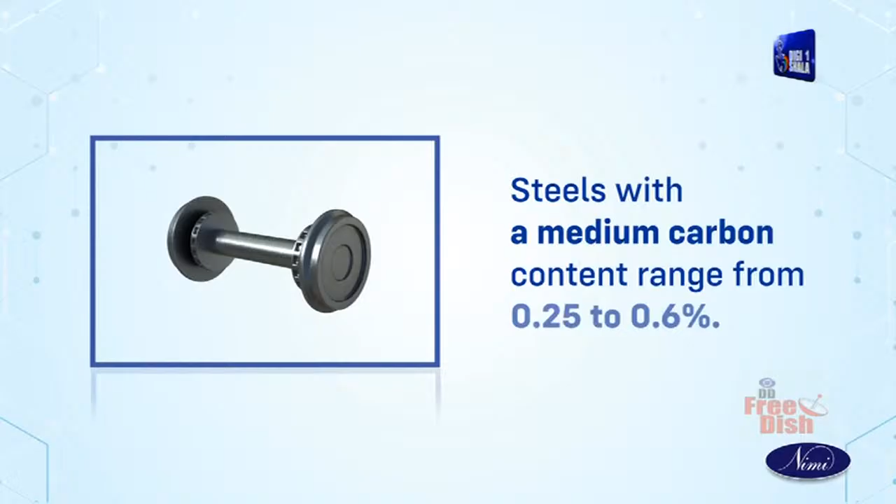2. Medium carbon steel. Steels with a medium carbon content range from 0.25 to 0.6%. Compared to low carbon steels, this higher carbon content increases the strength and hardness of the steel. Nevertheless, these steels are less ductile than low carbon steels. Because medium carbon steels contain more carbon and manganese, they can be tempered and quenched. These steels are well suited for usage in railway applications, in addition to being frequently utilized to make parts for the automotive sector, such as gears, axles, and shafts.

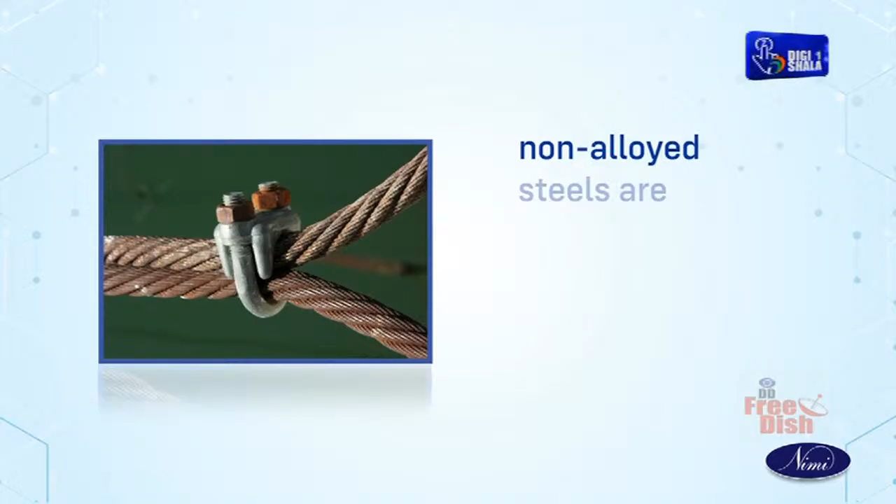3. High carbon steel. The strongest non-alloyed steels are high carbon steels, which have a carbon content of 0.6 to 1%. They are strong and retain their shape well, making them perfect for applications needing resistance to mechanical wear. The downside is that these steels are less weldable, ductile, and impact resistant than lower carbon steels. Spring, blade, rail, wire rope, wear-resistant plates, tools, and other items are made of high carbon steel.

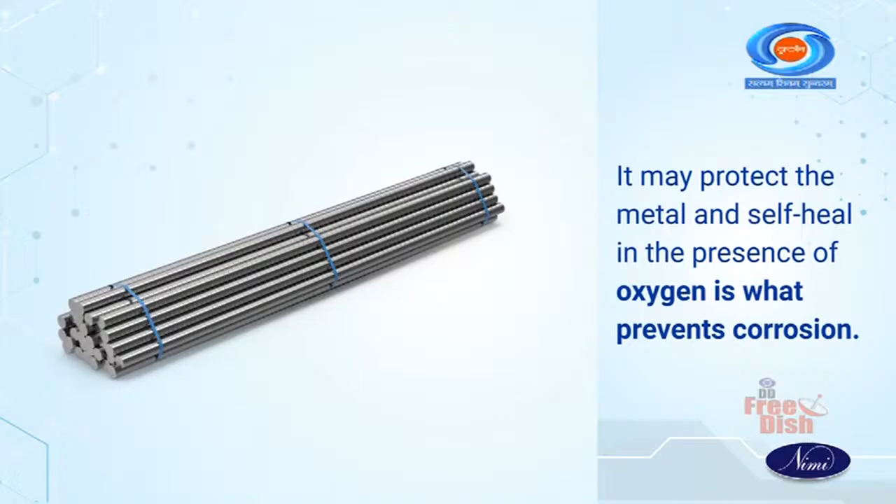4. Stainless steel. An iron alloy that resists rust and corrosion is stainless steel. It has at least 11% chromium and may also include other non-metals and elements to achieve other desirable qualities. The chromium in stainless steel creates a passive layer that may protect the metal and self-heal in the presence of oxygen, which is what prevents corrosion. Let us do in practical.

Step 1. Prepare the grinding machine for grinding. Step 2. Support the metals on tool rest or work rest. Step 3. Apply light pressure on the face of the wheel with metal. Step 4. Grind the metals on wheel face. Step 5. Identify the metal by spark length and color. Step 6. Grind the metal only on the face of the grinding wheel.

Grind the following different metals and identify the sparks. Different metals: 1. Low carbon steel. 2. Medium carbon steel. 3. High carbon steel. 4. High speed steel. 5. Stainless steel. Let us discuss on spark test.

Objectives: this shall help you to 1. Identify the spark testing in different metals by grinding. 2. Perform grinding process in grinding machines. It is a method of determining the general classification of ferrous materials.

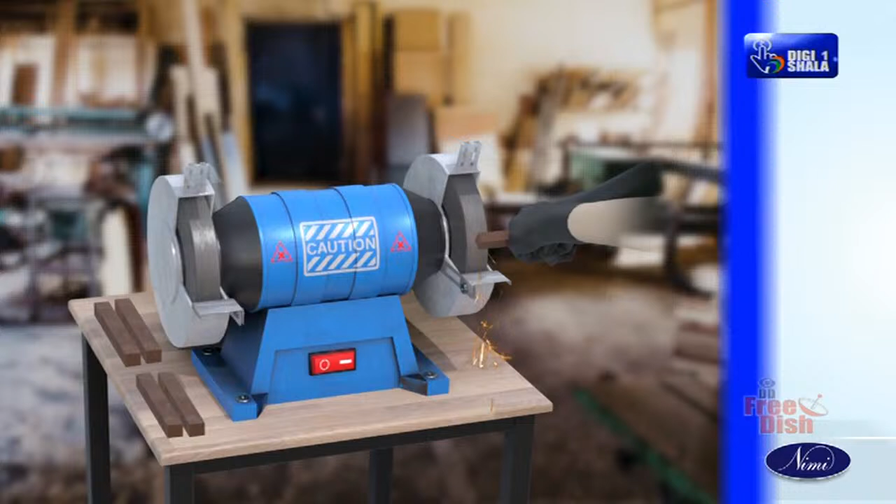It normally entails taking a piece of metal, usually scrap, and applying it to a grinding wheel to observe the sparks emitted. These sparks can be compared to a chart or to sparks from a known test sample to determine the classification. Spark testing can also be used to sort ferrous materials, establishing the difference from one another by noting whether the spark is the same or different.

Spark testing is used because it is quick, easy, and inexpensive. Moreover, test samples do not have to be prepared in any way, so often a piece of scrap is used. The main disadvantage to spark testing is its inability to identify a material positively. If positive identification is required, chemical analysis must be used. The spark comparison method also damages the material being tested, at least slightly.

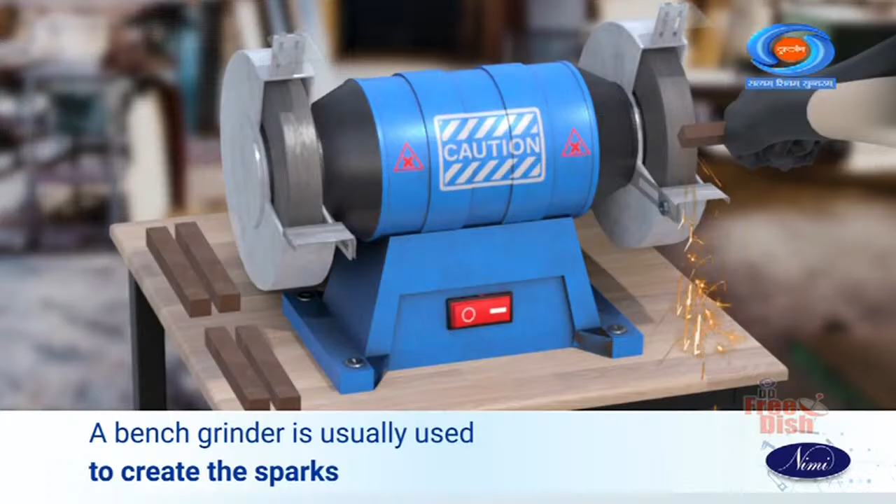Spark testing most often is used in tool rooms, machine shops, heat treating shops, and foundries. Process: a bench grinder is usually used to create the sparks.

But sometimes this is not convenient, so a portable grinder is used. In either case, the grinding wheel must have adequate surface velocity, at least 23 meters per second, 4,500 surface feet per minute SFPM, but should be between 38 and 58 meters per second, 7,500 to 11,500 SFPM.

The wheel should be coarse and hard. Therefore, aluminum oxide or carborundum often are employed. The test area should be in an area where there is no bright light shining directly into the observer's eyes. Moreover, the grinding wheel and surrounding area should be dark so that the sparks can be observed clearly.

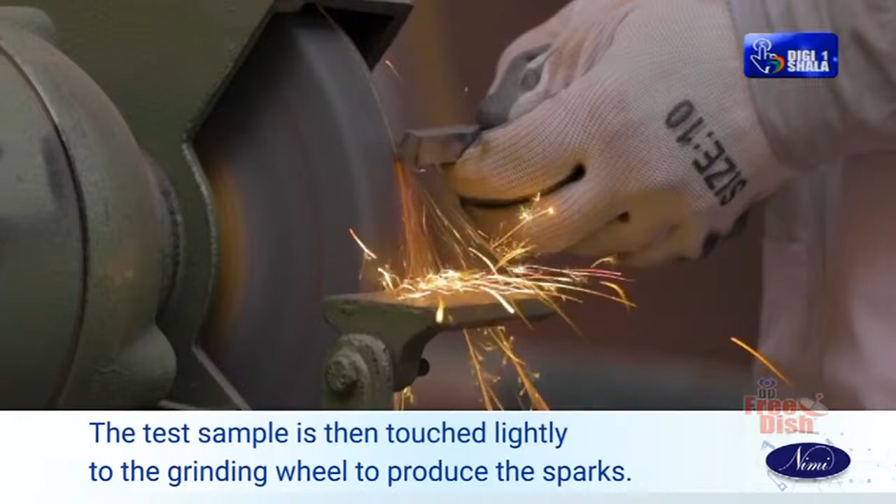The test sample is then touched lightly to the grinding wheel to produce the sparks. The important spark characteristics are color, volume, nature of the spark, and length. Note that the length is dependent on the amount of pressure applied to the grinding wheel, so this can be a poor comparison tool if the pressure is not exactly the same for the samples. Also, the grinding wheel must be dressed frequently to remove metallic buildup.

In this video, we have discussed ferrous metals, their properties, types of ferrous metals, how to conduct spark test with grinding machines, identify the spark testing in different metals by grinding, and perform the grinding process in grinding machines. Thank you for watching. Have a good day.

Today we'll discuss a topic on firefighting pumps, installation and maintenance. Introduction. All buildings, depending upon the occupancy, use and height, are protected by fixed firefighting.